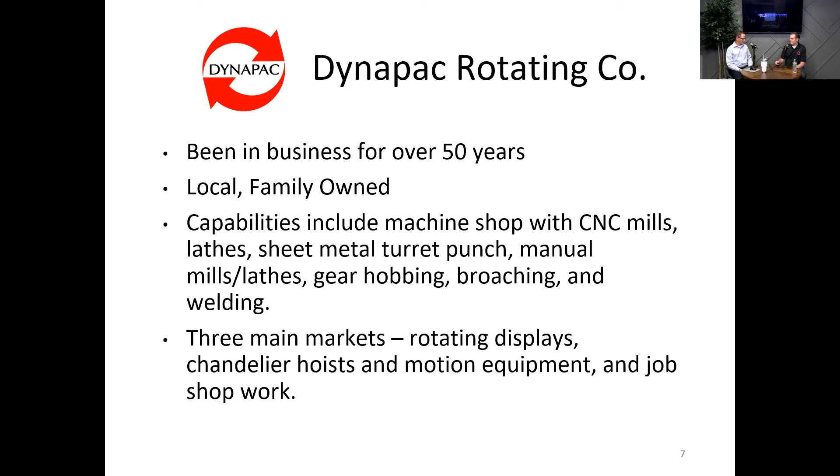The third area is just job shop work, where we're making parts and may not know what they're for, but we make them to whatever the print says, because we have extra capacity on our equipment and the machines, so we fill it up.

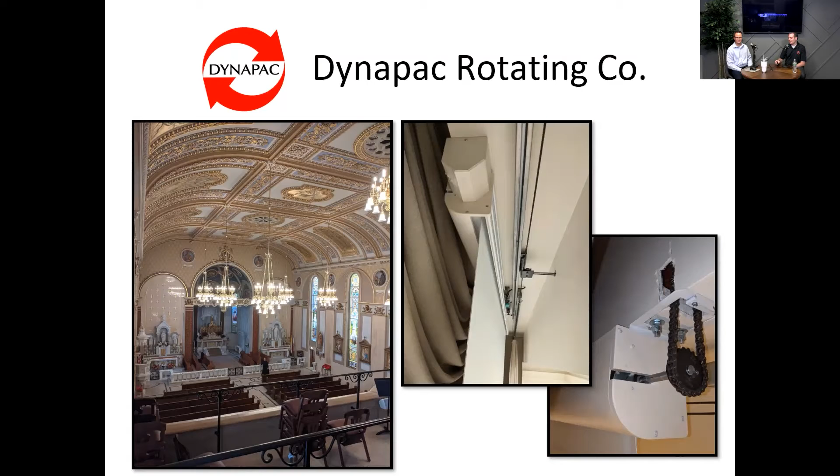I also threw in a picture of the projector screens. Again, we're up in the attic, you're not seeing it, but we're the magic behind it. And then just some sample machine shop parts that we do.

Gear hobbing and gear broaching is something that we do that not a lot of other companies do. So, a little bit about Dynapac. Thanks for sharing it. Now everybody understands at least what you did.

So now we understand why changeover times are so important, because you've got to go from this job to that job, and you've got to do that quickly, or you're just burning labor hours.

Yep, exactly. So one of the things when I signed up for the Six Sigma Green Belt class with you guys, I remember you said pick something where it bothers you when this happens. And one of the things that bothered me was when guys come up and say, I can't find this tool, I checked 4 spots it could be and it's not in any of them. And I always went, why are there 4 spots? It should either be in a machine or in the drawer, that's where it should be.

Part of this is just the curse of being an old company. You have a long time for things to deteriorate, evolve over time. So anyway, that was part of how I picked this. I was tired of that, not being able to find tools or knowing we bought something but not knowing where it is.

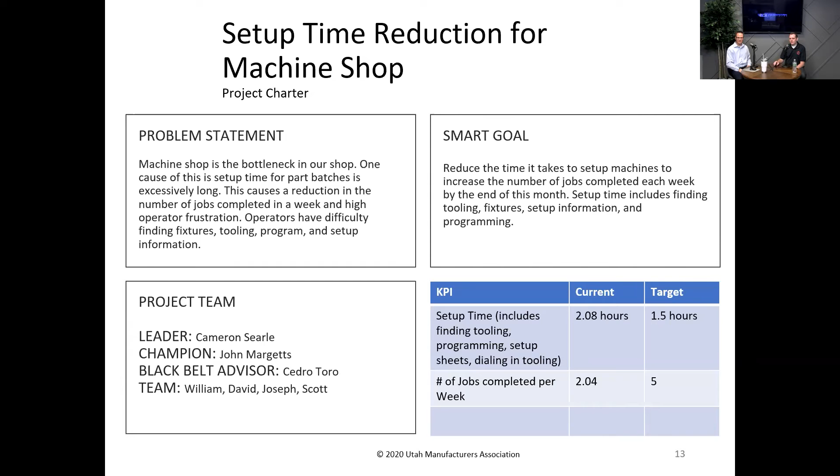A lot of this, one of the challenges for us on this project, was that we vary so much. We'll do a custom part project where you're only making 10 parts, and then a batch where we're making 200 parts, and the complexity varies a lot. So it was difficult, that was one of the challenges in gathering data, how to measure it with such a wide variety of parts and complexity. For a really complex part, setup time takes a lot longer, whereas another part might only take a couple tools and be a lot faster. So that was one of the things we had to balance.

But here's our team here that we had, our machinists and shop leaders. And these are just some of the steps that we walked through in this DMAIC process, the Six Sigma process.

So for people that aren't familiar, the project charter we just showed is part of the define phase of the 5-step problem solving method we call DMAIC, which goes through defining the problem, measuring the current state of the process, analyzing the root cause of the problem, then implementing improvements to make the process better, and finally landing in control where we lock in any improvements that we made.

If you were in the last session with JP, he talked about just experimenting, trying new things. And that's what this is all about, identifying who needs to be involved so we can go experiment and try new ways of doing things, see if we can find a better way.

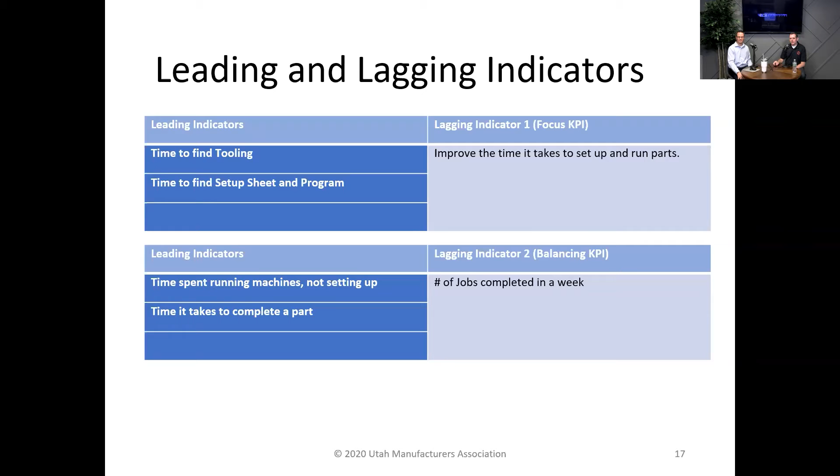So we went through the steps here of who's involved, who has the most influence, who needs to be involved, who does it affect. I think one of the risks that we talked about in the class was that the main risk for us is just finding the time to do it.

I really liked your idea of just picking a day and doing it, rather than trying to work on it an hour a day. Yeah, that's actually eventually what we did. When we had an idea of what we wanted to do, we just picked a day, pushed pause on everything, hit it hard, and got a bunch done.

There really never is a good time to pause production to work on improving production, right? It's the sharpening the saw mentality. I'm so busy cutting down the tree, I don't have time to stop and sharpen the saw, even though I know that if I sharpened it, my job would be so much easier. I just can't bring myself to stop cutting down the tree. It's really hard to do that.

Congratulations to you and your team for having the courage to say, okay, we're actually going to pause, go sharpen the saw, and get back to it. That takes courage. We had to kind of talk through it, and I know some people were kind of like, you want to do what? But it worked out well for us.

And then I guess the other main risk, as always, is sustainability - when you make improvements, keeping them improved. Once you've made the changes, don't revert back to how you did it before.

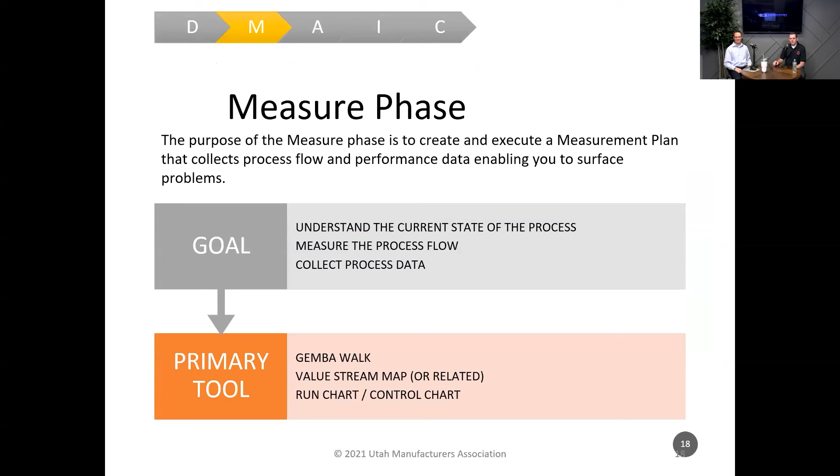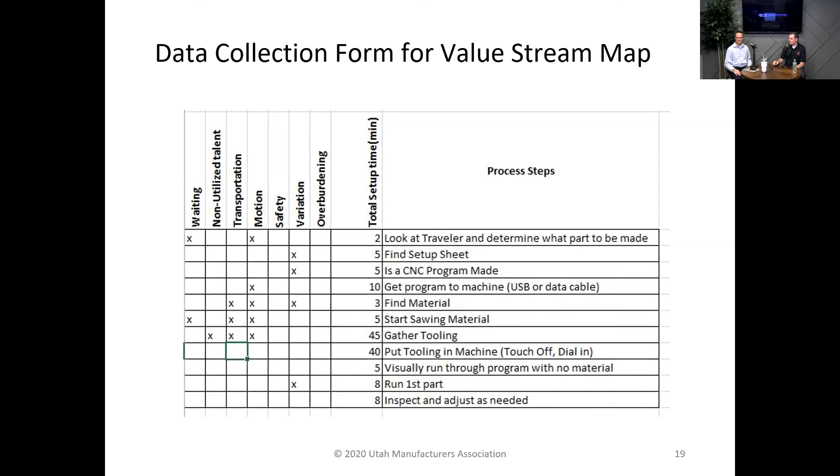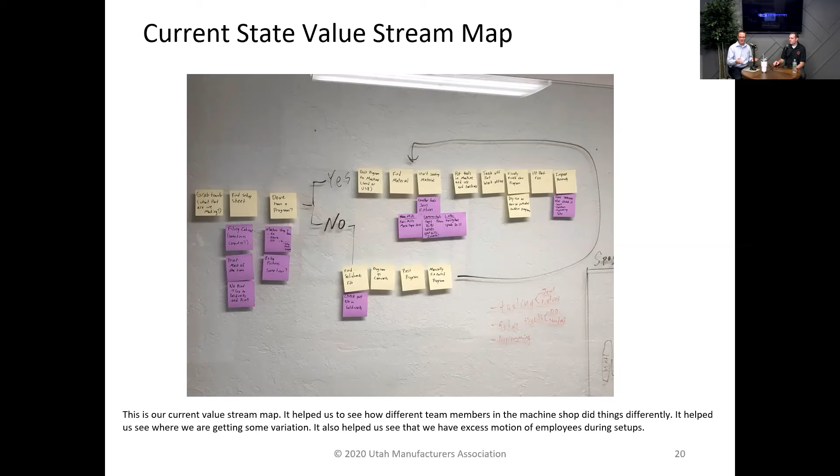We gathered some data and started tracking jobs a little better than we had been - setup time, and how long it actually took to do jobs. I'll admit, historically we probably hadn't been the best at that. We were looking more at overall time for a job, not specifically how long it took to set up for a job. Identifying that helped give us a base measurement point to start from.

So it looked like your average setup was about 2.08 hours, but there was a lot of variation - some setups were a lot longer, some were a little shorter. So you've got both a long average and potentially a lot of variation that could be reduced, if you aren't looking in all four locations for that thing you needed, right?

Yep, that's exactly it - just a lot of variation depending on what it was. So that's the goal: before we were taking lots of time, or it just varied on how much time it took to set up, and we're trying to tighten that up so we know what to expect and can plan on what it takes to move to the next job.

So that was the end of the measure phase - then you understood your process. Now we're going into the analyze phase, trying to find the root cause of that long changeover time.

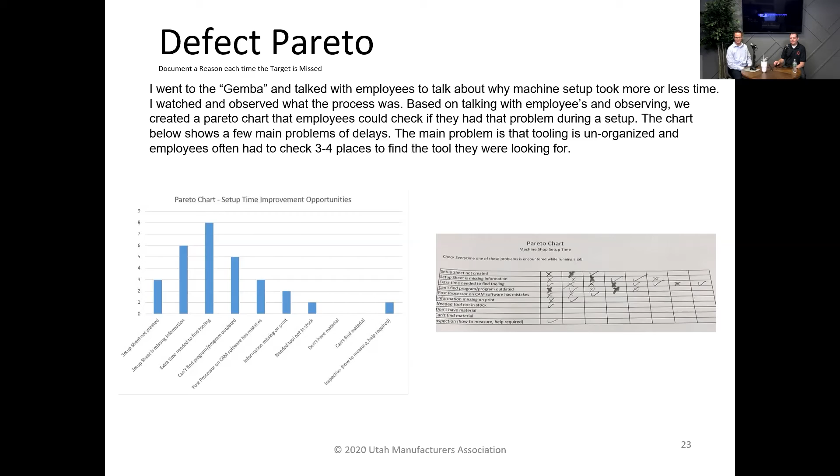So yeah, the fishbone—I think it's just good for people to see the process you went through here. You created a Pareto chart, used a tick sheet to gather information, and did a fishbone root cause analysis. People learn these tools or talk about them, but actually doing them is different.

What was the value of actually following this process as opposed to just going out and making changes from your intuition? Yeah, I think the biggest thing is sometimes you think of an idea and you just implement it really quick, but you don't take the time to really analyze what all that affects.

So I think slowing down a little bit and analyzing what actually works, where things are actually located, where people are actually working, helped. And then putting some numbers behind it.

What was the other thing? Historically, maybe we wouldn't put numbers on it. We would just say, well, obviously that would help, and just do it. Yeah, you kind of feel, well, obviously this will be better, but how much is it better? And is this even our biggest problem that we should be solving?

Yeah, so I thought that was kind of the interesting thing on this—it gave you a before and after number that you could actually look at.

So 5 whys, kind of walking through why guys are doing what they're doing, why we're having these issues, and we used that to make some corrections.

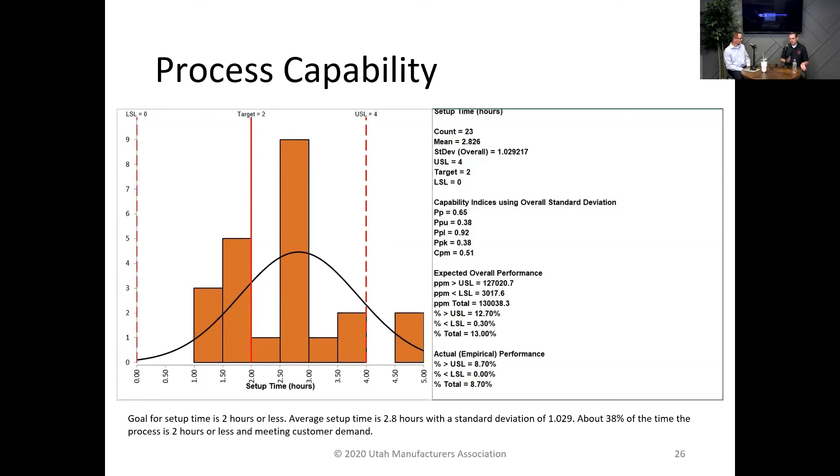So to dive into improving here, we looked at that value stream map, looked at how we could streamline this and make it a little easier for everybody, made a plan, and then we just implemented it.

What were some of the big changes that you came up with that had the most impact on the process? A lot of this is kind of basic stuff that makes sense, but actually taking the time to organize tooling, where it's located—I have a floor plan in here later that I'll show you some pictures.

Oh yeah, do you have pictures? Okay, I'm jumping ahead, go ahead. Well, take us to the pictures then. I guess we'll go to results. Let's do it. The main thing was just putting tooling centrally located within the shop.

And so we have our machine shop with all our machines, and we put it right smack in the middle, or as central as we could. So before, we had a filing cabinet with setup sheets at one end of the shop, and then the tooling was at the other end, and multiple cabinets with tooling again all at opposite ends. So as you're setting up, it would require you to go back and forth.

We'll get to a spaghetti diagram here that shows you just had to walk all over. It's just kind of how things evolved over time, where maybe you cleaned up one area, but it wasn't in the right spot. Or we made setup sheets, which was a great idea, but we put them way over there instead of by the machines where they're actually needed.

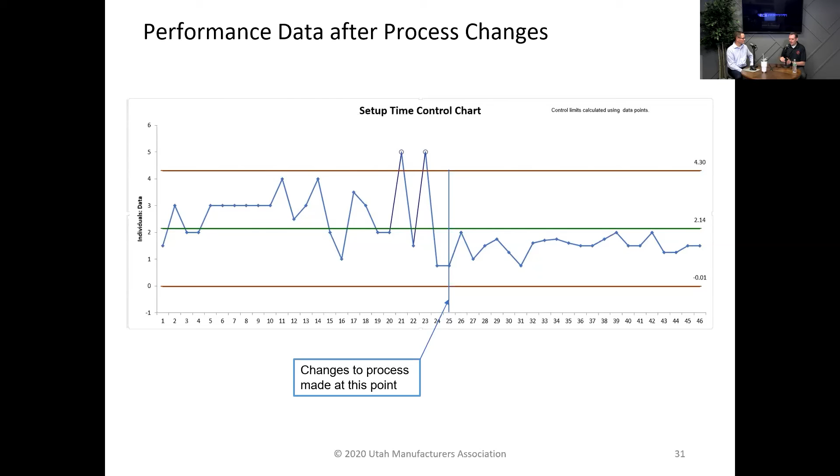So we'll look at that. But just looking at this, you can see after we implemented these changes, our setup times really leveled out. People were able to find parts, find what they needed. It was right there, and it reduced all that walking and transit time, that transportation waste.

For those who aren't familiar, these are control charts, which show the dots as the performance, the changeover times. The green line in the middle is the average, and the red lines are the upper and lower control limits, showing how much variation you can expect 99% of the time in this process. By shrinking, if you notice how those red lines from before and after have shrunk dramatically, that indicates the process has significantly less variation than before, which is a huge tribute to your team for being able to take that much variation out of the process.

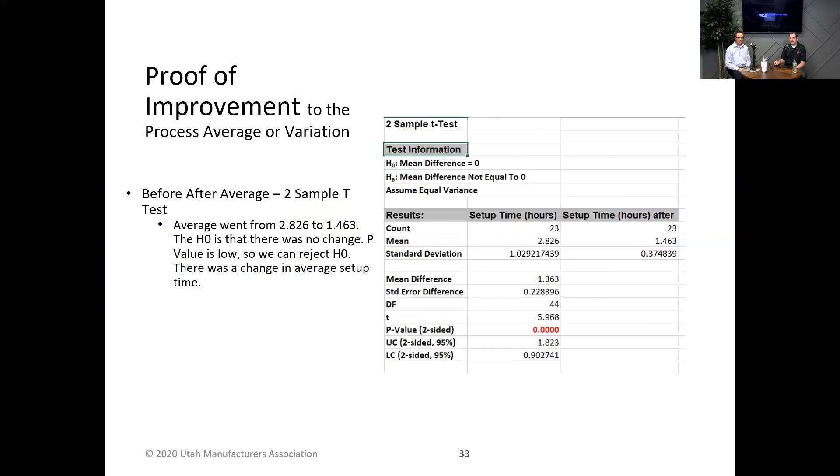That was the main thing, you're seeing those come in, and it's just a lot more consistent than it was before. So you don't have to guess when you're creating the schedule, whether this changeover is going to take 1 hour or 6 hours, right? That makes it hard to plan or make promises to your customers, I'd imagine.

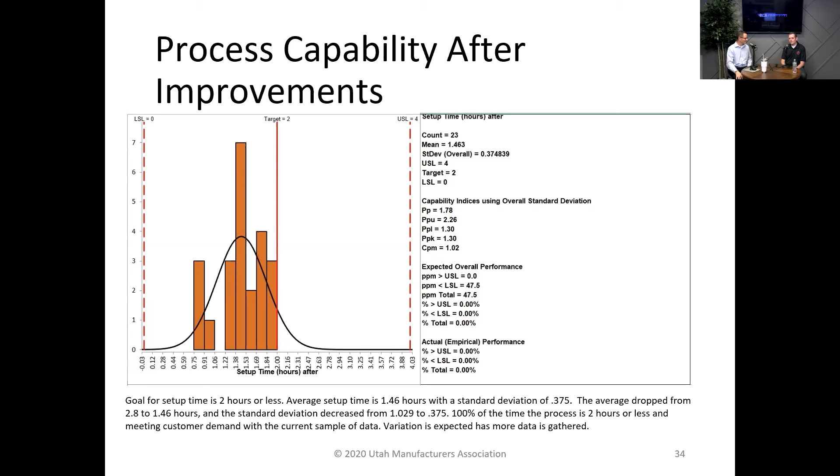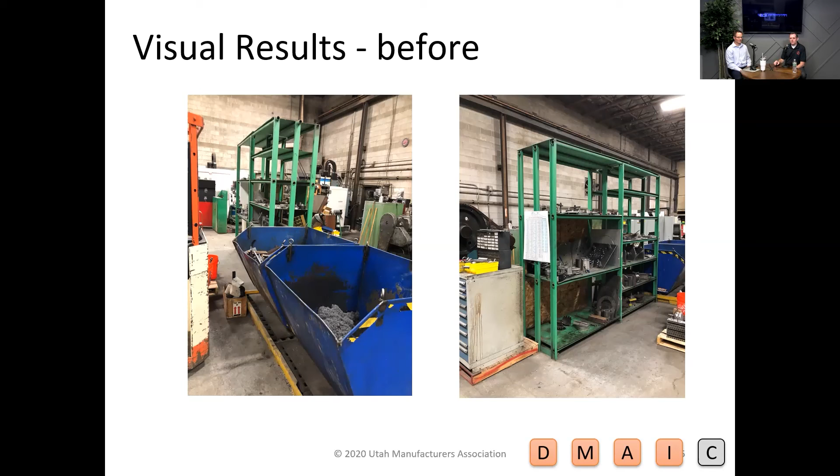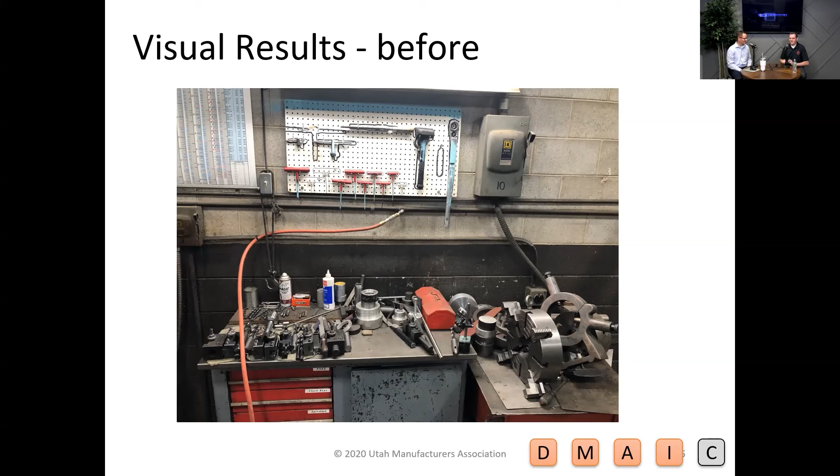I'm sure no one else's machine shop looks like this, but you know how it is, flat spaces collect stuff, tables collect stuff, that's just how it is. If there's a surface, it's going to get something on it. So we just walked through and tried to organize some of this stuff.

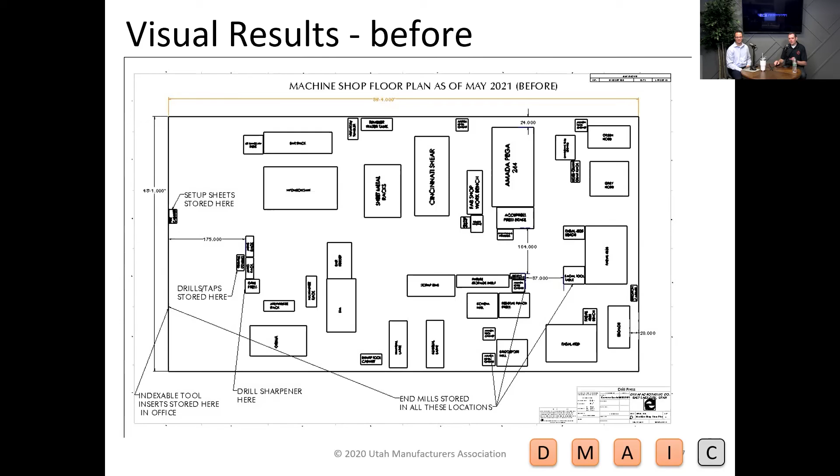This is probably hard to see, but again, that's the machine shop and all the equipment we have, and we tried to move everything centrally. Pardon my paint drawings here, but you can kind of see walking in from one end to the other, you had to check multiple spots and do a lot of back and forth.

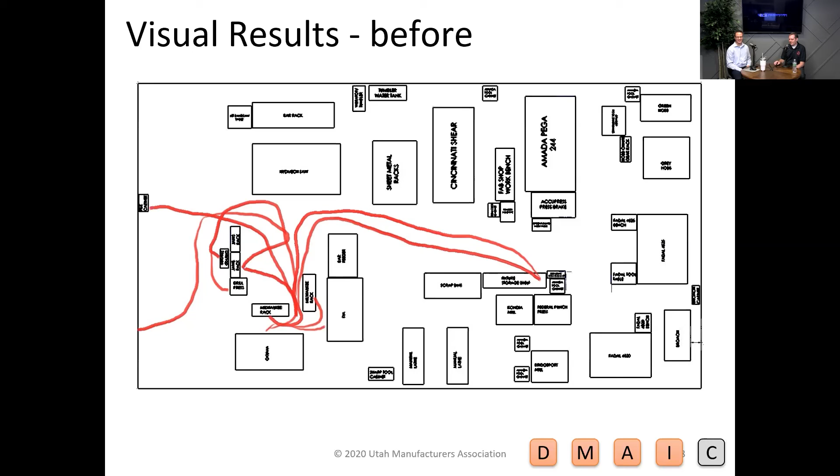So the goal now is, we took those shelves out. You can see the blue bins are still there. We put our setup sheets down there, moved a bunch of tooling holders down there, got a couple cabinets down there holding a lot of our tooling, and we even put our drill sharpener down here. Again, just tried to centrally locate as much as we could right there in the center.

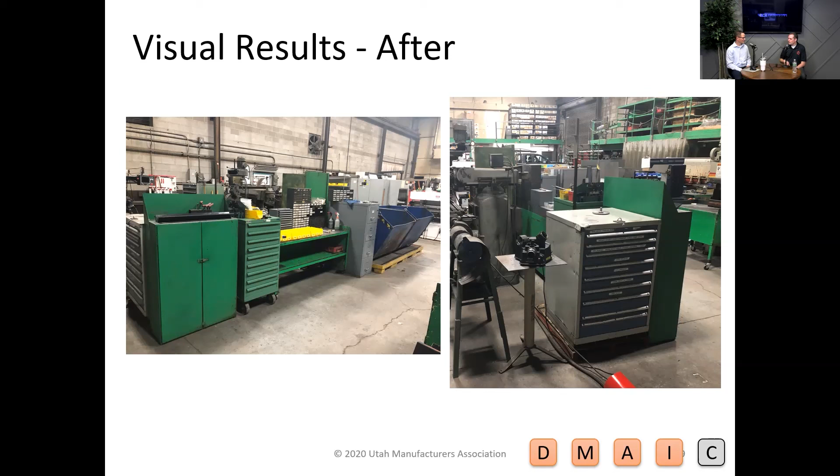As part of sustaining that, I put these in with clear labels. That's where it sustains - it's clearly marked, so it's easy to keep putting things back where they go, the easiest way to do it. I don't have to think about it. Otherwise, if I can't find the place right away and I'm in a hurry, I'll just set it on this table. That's what you're trying to avoid.

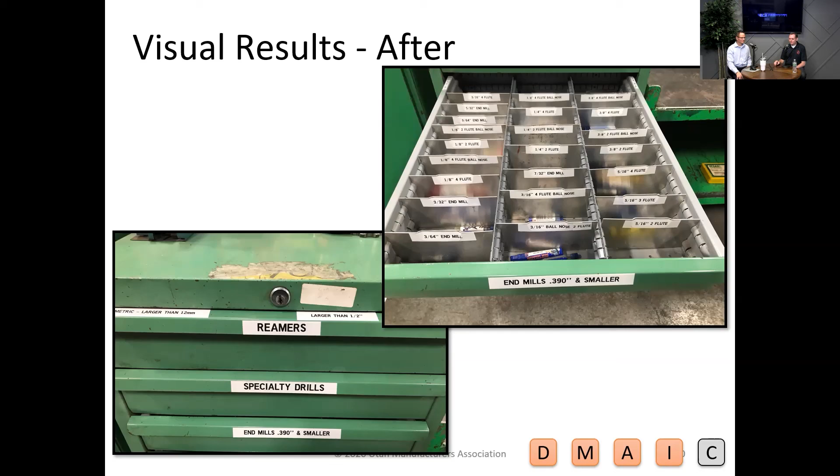And maybe just to throw out, we did this at a pretty low cost. You can see we used cabinets we already had - we didn't even buy anything new, we just rearranged what we already have. So cost-wise, this really wasn't a very expensive thing. Which is a great rule of thumb for anybody doing continuous improvement - most of the time you can make significant process changes without spending money. You don't have to buy new equipment, hire more people, or get something fancy. Just use what you have and find a better way of running it.

This was that picture before that had the bench with all the stuff on it. So we got some shelves there for tooling that's needed for the lathes, and we organized those. You could always improve this further, but we at least got it to that point - got rid of the messy table.

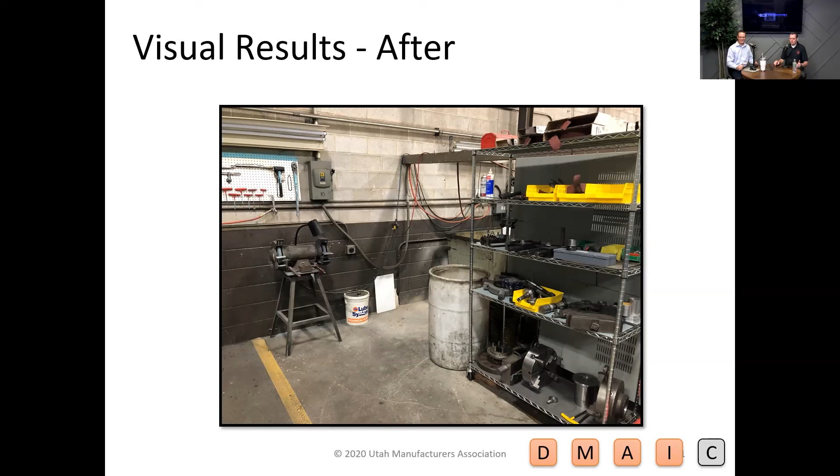And that's the right way to look at it too - saying we went this far doesn't mean we're done. We're never done. I think all of these we could take a few more steps, and we'll continue to do that. This is hard to see probably, but we're trying to get things centrally located. This was an example of one of the lathes - you'd go down to that central area, get what you need, and you should have it.

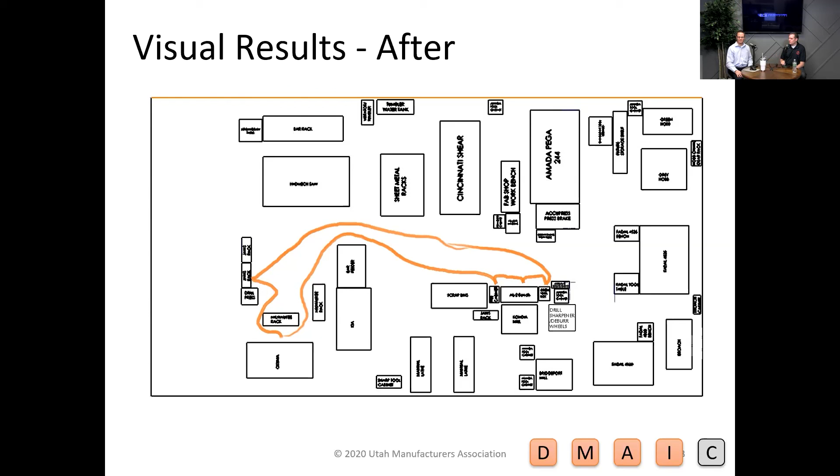So kind of what we've been saying is cut down on setup time. It helps everyone - I've heard multiple people say, oh, I can find tools now, I know where they are. So the employees are actually happier. That's a good indication that something's been done well - if people are like, oh, my job's easier.

I think that's one thing too - people learn a lot about lean manufacturing, they hear it's all about getting rid of waste. But if you study lean, you learn that a big part of it is helping employees' jobs be easier, not overburdening the employees. So that you got that feedback is awesome.

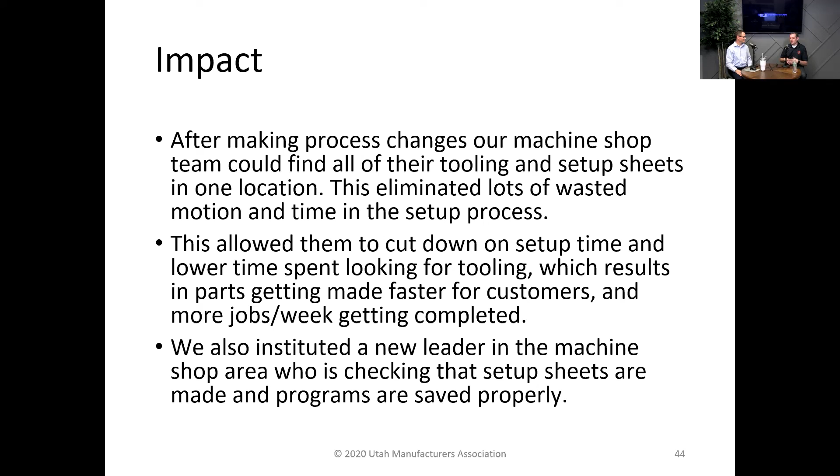I actually made that point to the team as well as I was taking the classes, and then reporting back to them. I remember talking about that in class, and that was something I said to them - hey, this is all about making life easier for you. I don't think anybody likes taking a long time or not being able to find what you need. That's frustrating, so let's fix it.

And that's the argument when people say we don't have time to shut down the line and sharpen the saw. Well, if you can get a 4-week payback period out of the improvements you're making, then you can justify shutting down. But it takes some faith, doesn't it? Yeah, it did. So we were able to do it mostly - we did a big thing on one day, and then did some smaller things after that, but it was the one big day.